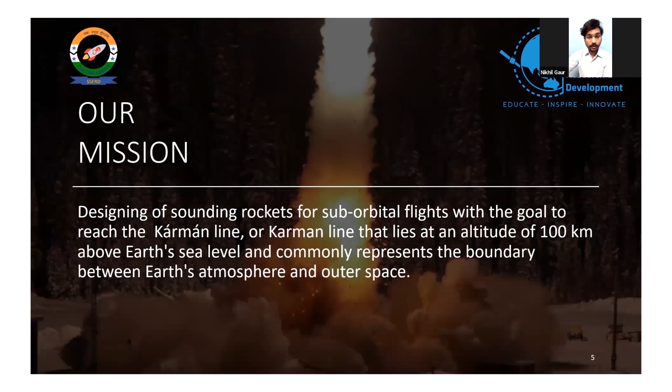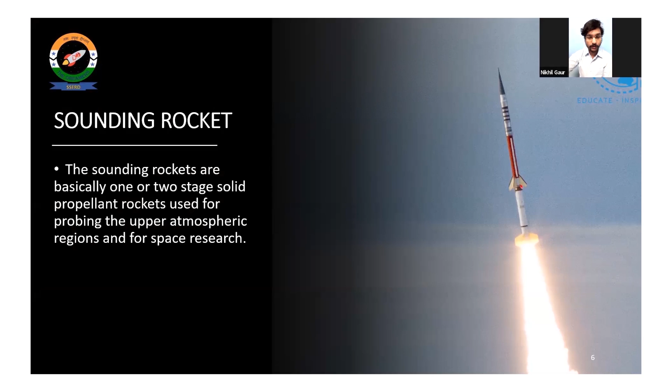Next, the first one is about the project. Our mission is to design a sounding rocket capable of crossing the Karman line, which lies about 100 kilometers above the Earth's sea level, with a total operational payload time of 100 seconds above 100 kilometers. So what is a sounding rocket? Sounding rockets are basically one or two-stage solid propellant rockets used for probing the upper atmosphere for scientific or space research. Now I'll present the mission data we collected.

The first design parameter is delta V, the change in velocity required for achieving our target altitude of 100 kilometers. Here is the total change in velocity we estimated by considering gravity losses and aerodynamic losses for achieving the altitude of 100 kilometers and operational time of 100 seconds. The total delta V comes to 3000 meters per second, or 3 kilometers per second.

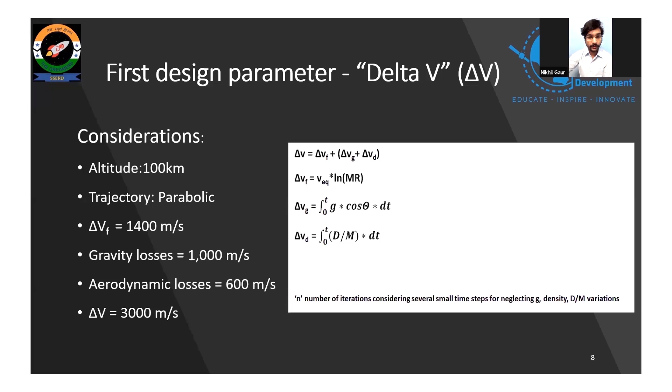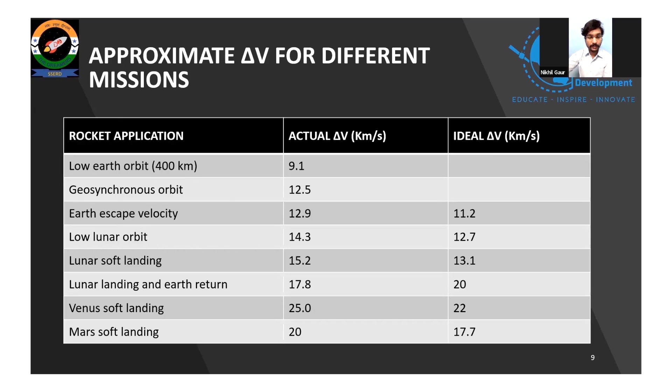We want to grasp an idea about what our delta V should be, as compared to the operational missions of different space organizations. The next prime performance parameter we considered is the ISP, specific impulse, which indicates the performance of the rocket engine. The higher the ISP, the better the performance. Basically it's like mileage for a road vehicle, such as a car or scooter.

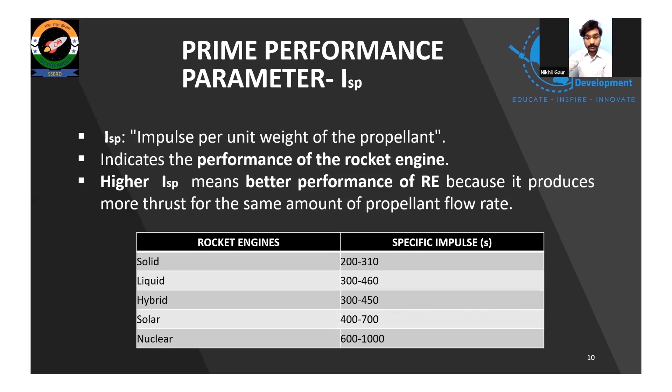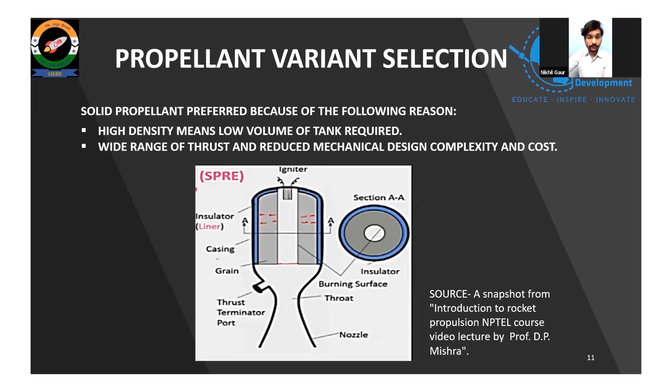These are the different rocket engines and their respective ranges of specific impulses. Out of an intensive data survey we did for different propellants like solid propellants, hybrid propellants, liquid cryogenic, and liquid storable propellants, considering design complexity, cost, and high density meaning low tank volume required, we finally selected the solid propellant rocket motor for simplification of our design.

Here is a schematic of the solid propellant rocket motor. The solid propellant we selected is a new one, a smokeless propellant, HNIW, CL20, China Lake compound. We selected this as our oxidizer and propellant because it gives around 14% higher energy per mass and 20% higher energy density than HMX, which is conventionally used.

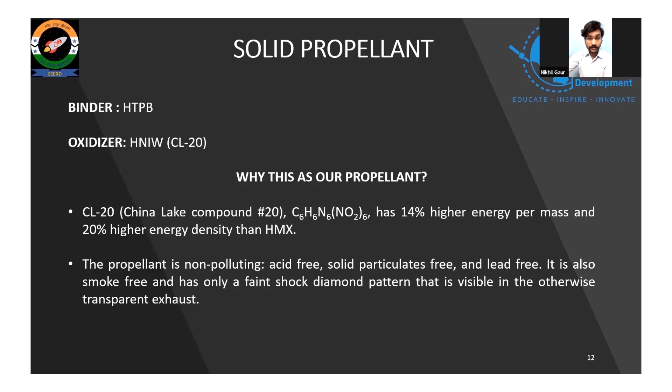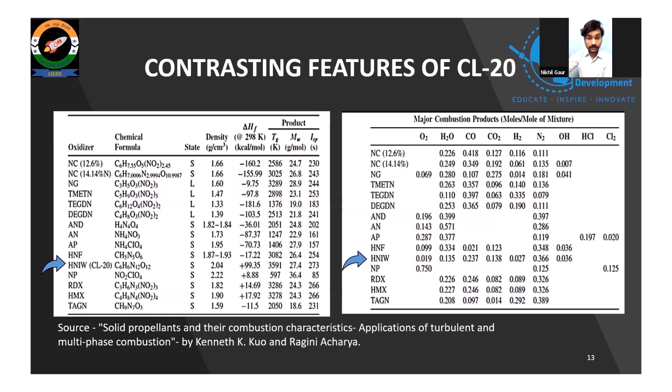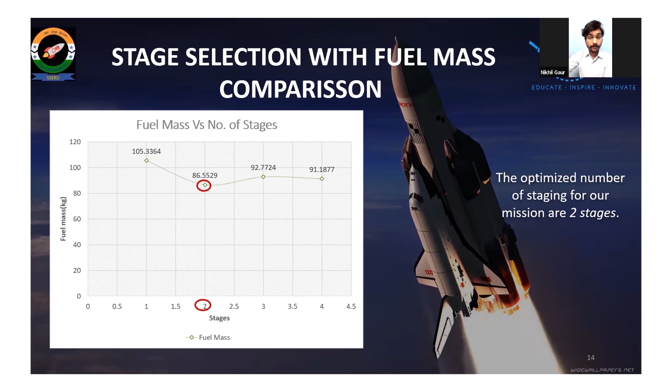Now the question arises, how many stages will we require for our mission? By considering the dry mass budget for different stages — single stage, two stages, three stages, four stages — we conducted this estimation and finalized the fuel masses required. As this graph shows, the two-stage configuration gives us the most optimized number of stages for completing our mission. So we are going with two stages.

Now I would like to invite Amin and Pawan to present their views, data collection, and work on propulsion systems. Hello everyone, good evening. Pawan and I will be presenting the nozzle design and the rocket engine design.

So basically we wanted a very good rocket engine which would propel us to our objective. Beginning with the shape and design, we chose a bell-shaped nozzle rather than a conical or aerospike one, because it had less weight and gave higher performance than a conical one, and it was better for this objective than an aerospike one.

We also chose a material strong enough thermally and physically to contain the heat and pressure of the rocket, so we went with titanium grade 5, which is amazing at holding both. But since it alone isn't enough, we added graphite ablation, which eases off the pressure and temperature along with the titanium. As it ablates away, the graphite takes heat and energy with it, reducing the stress on the titanium. Next, over to Pawan to explain the stage parameters.

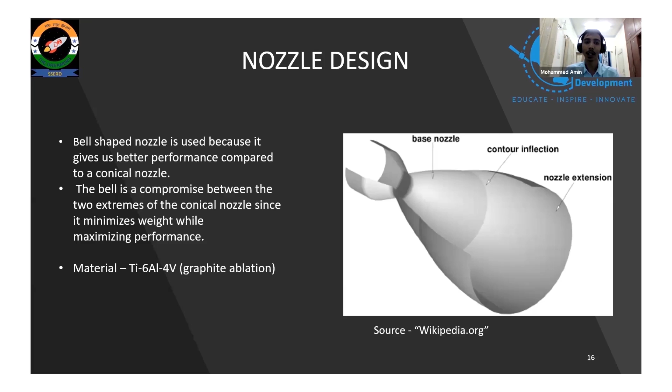Thank you, Amin and Nikhil. Now I'll go over the nozzle parameters for both stage 1 and stage 2. We got the thrust requirement from the system engineering team, around 1015 Newtons, and the chamber pressure was given by the tank design team, around 7 megapascals. Our task was to design a nozzle for both stage 1, at 0 altitude, and stage 2, at 14-kilometer altitude.

We designed it with an expansion ratio of around 93.594 for stage 1 and 140 for stage 2. We got a throat area of around 0.00018 meter square, and the chamber temperature was around 3591 Kelvin. Our propellant, which weighs around 27.4 grams per mole, gave us a gas constant of 303.44.

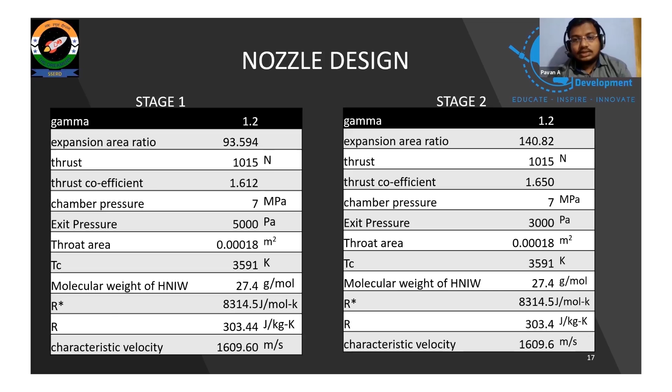Further calculating the exit Mach number and nozzle area parameters, we got a nozzle exit area of 0.0084 meter square, a throat diameter of 0.0107 meter, and an exit diameter of 0.1035 meter. We achieved this with a throat temperature of 3264 Kelvin and a throat pressure of 3.94 megapascals, with an exit velocity of around 2886 meters per second for stage 1 and 2900 for stage 2.

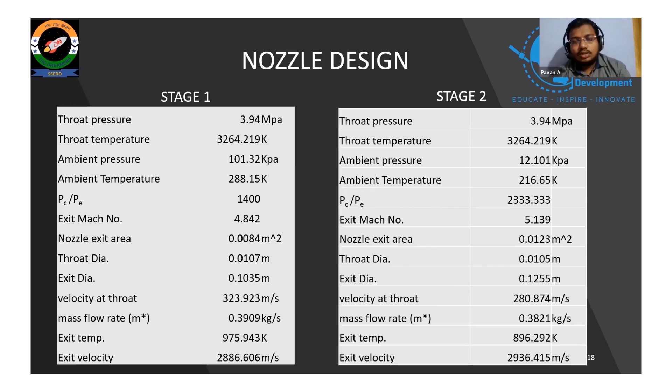We designed almost similar nozzles for both stage 1 and stage 2, since our thrust requirement was the same. Just due to the change in ambient pressure at different altitudes, there was a slight increase in exit Mach number at stage 2 compared to stage 1 — 4.84 at stage 1 versus 5.13 at stage 2. These are the nozzle parameters, and the total nozzle would weigh around 2.24 kgs.

And over to Aditya for tank design. Thank you, okay, hello everyone, good evening. My name is Aditya, and Varun and I are in charge of tank and structure design. Here are the parameters we obtained from the calculations.

Among the materials, we considered titanium alloy, maraging alloy 250, and aluminum alloy, and 15CDV6 steel, and among them we selected titanium. Aluminum, since it has low tensile strength, ends up with a high mass — that was the case for 15CDV6, which also had a higher density. Among both titanium and maraging alloy 250, titanium was least expensive and had more machinability.

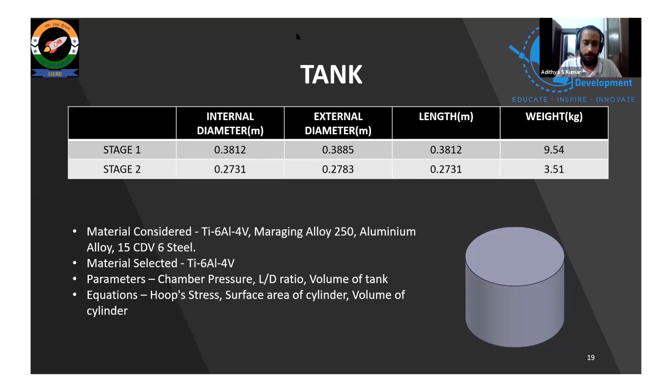We checked parameters like the L/D ratio, the chamber pressure, and the volume of the tank, and basically calculated using Hoop's stress formula and basic cylinder equations.

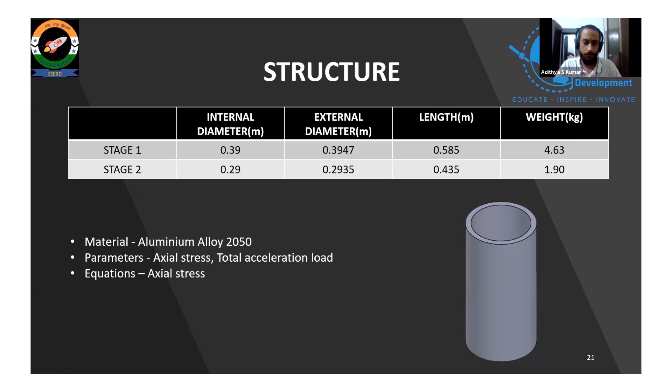Regarding the structure, this is the outer structure of stage 1 and stage 2. Here we chose aluminum alloy 2050, and we calculated thickness using the axial stresses acting on the surfaces of the walls, mainly using the axial stress equations.

About the nose cone, we used a von Karman nose cone because of its superior performance at supersonic, higher Mach numbers, and also chose the same aluminum alloy 2050. We had a small calculation here for the fineness ratio, and we chose a fineness ratio of 2.

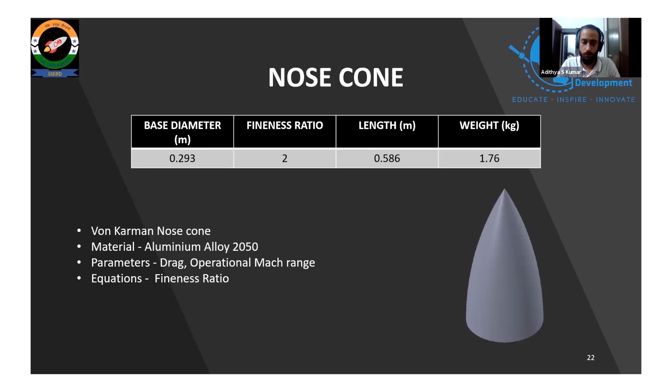And finally, the fin. Here we are planning to use a trapezoidal supersonic fin, in a 3-fin position, used for both stage 1 and stage 2. The material used here is carbon fiber reinforced polymer, chosen because of its aerodynamic properties and since it's used for payload rockets. It's fairly simple calculations — we used fin equations to calculate the overall dimensions.

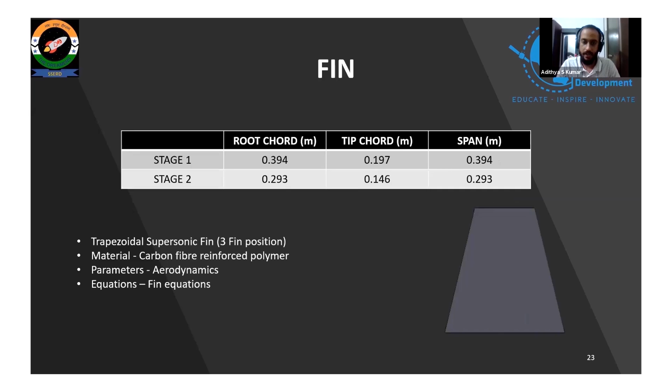This is the final design of the rocket we were designing, and over to you, Nikhil.

Yes, thank you, Adithya. So going forward with system engineering, based on the different designs of the components for the rocket — like the payload, nose cone, fins, structure and tank, nozzle, recovery system, and separation system — we got the dry masses for each stage to be these values.

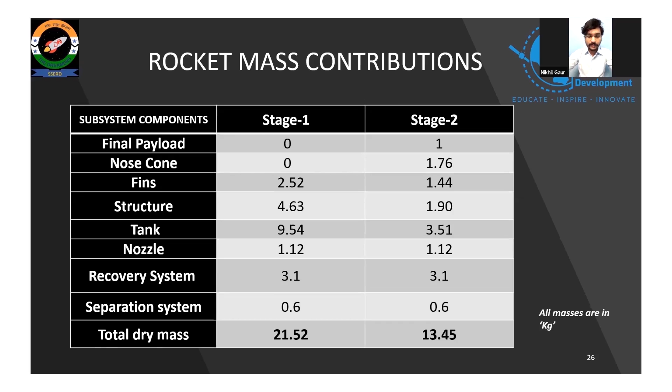We went for an estimation with 30 kgs for both the stages, and by the final mass estimation, we can see we've done a great job reducing the 2 stage dry masses, which gave us an advantage with fuel mass savings. We got around 36% savings in fuel mass compared to using a single stage instead of 2 stages.

Here's the altitude estimation and operation time based on the ISP inputs from the nozzle team, and the propellant mass, which we derived through mass budgeting using delta V equals ISP into G ln MR for both stages. We did these calculations using Newton's equations of motion, since we already considered drag losses, aerodynamic losses, and gravity losses in the delta V calculation.

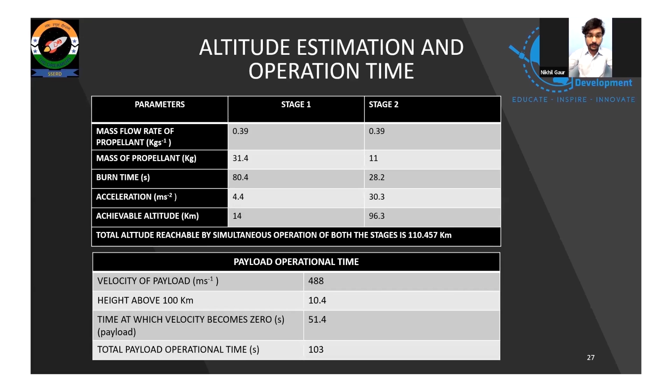Stage 1 is able to make us achieve an altitude of 14 kilometers, and stage 2 makes us reach 96.3 kilometers. So, by the simultaneous operation of these 2 stages, we reached an apogee of around 110.5 kilometers approximately. The payload operational time above 100 kilometers involves coasting for about 10.4 kilometers, and the time at which the velocity becomes 0 will be around 51.4 seconds. So the total payload operational time above 100 kilometers, our design altitude, is 103 seconds.

This is the flight envelope we have indicated here, showing the different staging operations. The first stage will separate at 14 kilometers altitude at t equals 80 seconds from launch. Then the second stage will reach 100 kilometer altitude around 181 seconds, and then it will coast until 110.4 kilometers, our apogee, reaching there at around 231 seconds since takeoff, after which descent will take place.

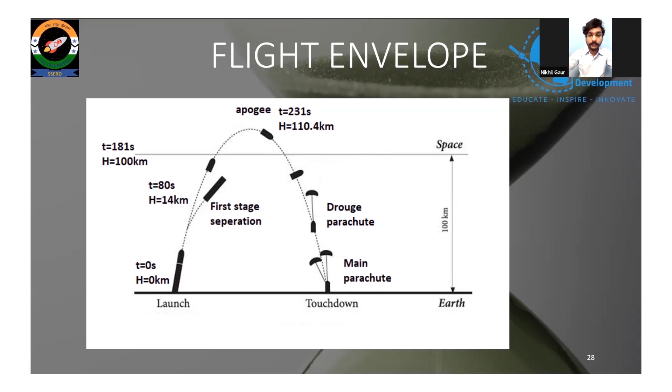Now I would like to invite Shreyas for the separation mechanism.

Thank you, Nikhil. I'm Shreyas, and I handle the stage separation mechanism design. In most multi-stage rockets, it's a practice to discard burnt-off stages to improve efficiency and performance. We carried out a requirement analysis and understood that we need an interstage separator that separates stage 1 from stage 2 after stage 1 burnout occurs.

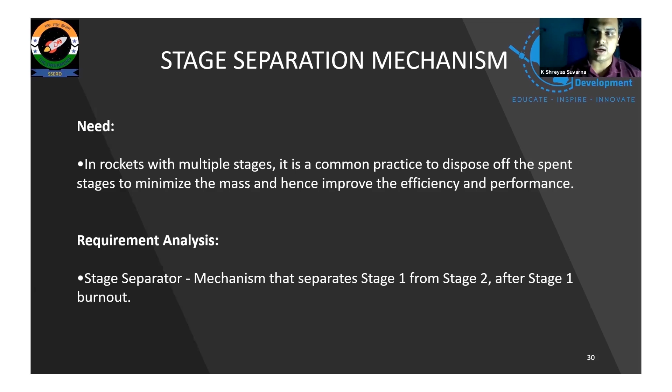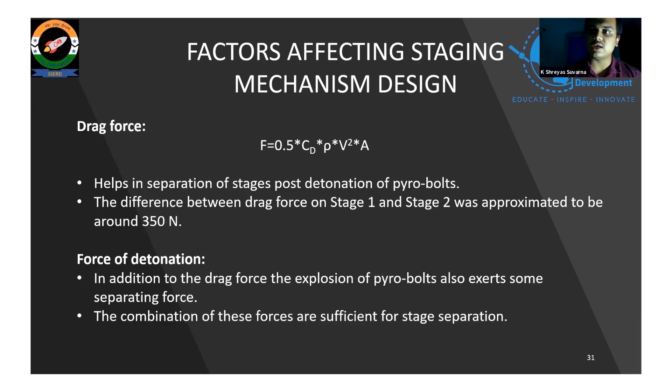There are majorly 2 things that affect staging mechanism design. One is universally applicable: drag force, which helps separate the stages post detonation of pyro bolts, which we'll be using in the staging mechanism. We computed the difference between the drag force on stage 1 and stage 2, approximately 350 Newtons. In addition, we have a force of detonation caused by the explosion of the pyro bolts. These forces are sufficient to ensure clean and neat separation of the stages.

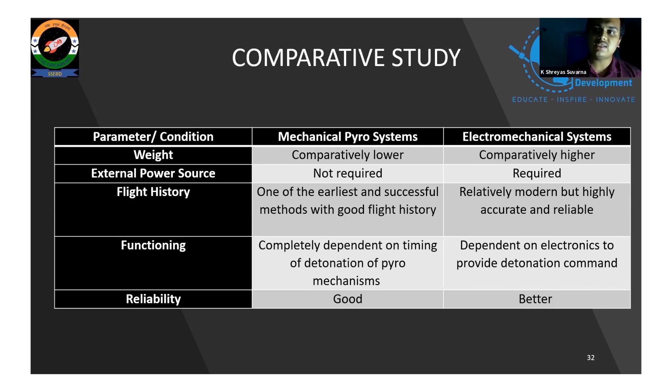Coming to the comparative study, there are basically two types of systems: mechanical pyro systems and electromechanical systems. We found that electromechanical systems depend mainly on avionics and are used in coupling with advanced avionics systems. But in our case, we did not need such advanced guidance systems, so we used mechanical pyro systems. However, our stage separation mechanism can also incorporate avionics.

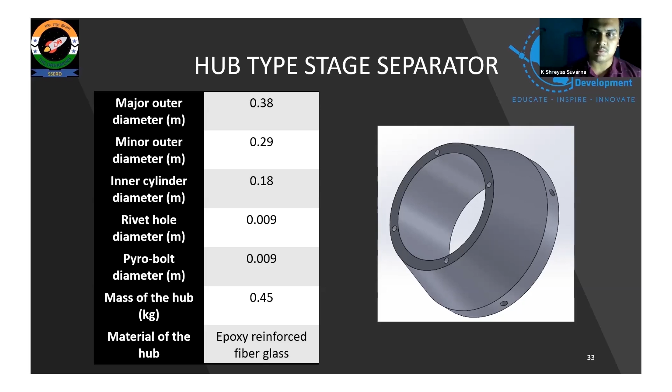So this is the hub type stage separator that we'll be using. We are using epoxy reinforced fiberglass material for creating this stage because of ease of manufacturability and high strength that can be obtained. Since SSERD is a research organization, it is unlikely there will be frequent launches for commercial purposes. Due to this, ease of manufacturability plays a very important role in material selection.

So I hand over to Rohit for recovery system and launch site selection. Thank you, Shreyas. I'm Vamshi, and I'll be handling recovery system and launch site selection since Rohit couldn't make it today.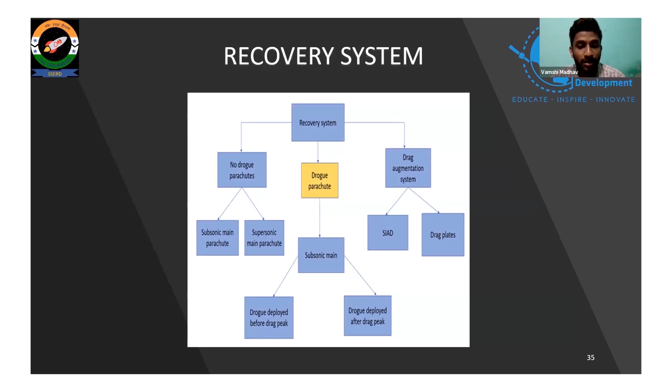We were asked to design a fully recoverable rocket. Hence we needed a recovery system that could recover both stages along with our payload. After reviewing several recovery techniques, we chose the drogue parachute recovery system as a suitable option for our requirements. The drogue parachute will gradually decrease the rocket's velocity when deployed after apogee, and after a while, when it's safe, the main parachute is deployed, which will drastically reduce velocity and ensure a safe recovery.

We selected the parachute shape to be circular to increase the drag force. A cold gas deployment device is used for deploying the drogue parachute, and for the main parachute, we used a spring mechanism to push out the canister when required.

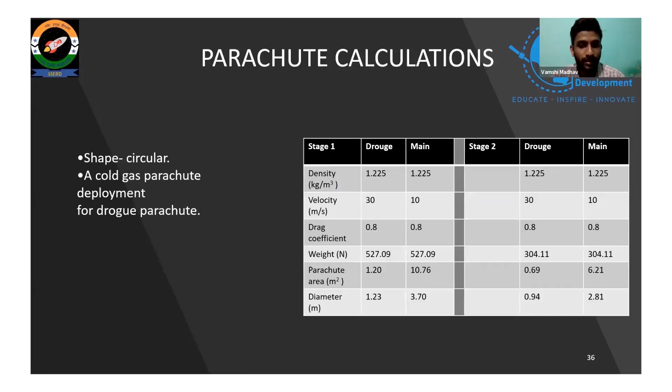Coming to the mass, we estimated the mass for the recovery system in each stage to be around 3.1 kgs. Here's a breakdown of our masses in the parachute and the parachute deployment systems. It's a detailed overview of the main parachute on the left-hand side, followed by the drogue parachute deployment system on the right-hand side. You can check the components in the parachute canopy, parachute bag, suspension lines, everything we included. So it was a pretty detailed analysis, and our estimation is believed to be correct.

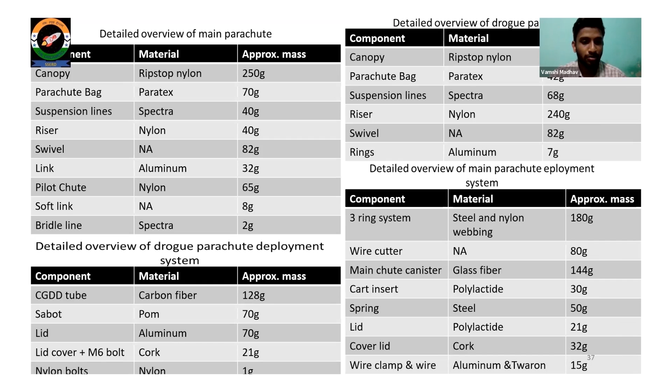Coming to the launch site, there were a few considerations we had in mind. First is the effect of magnetic field, and second is the environmental conditions such as the speed of wind, and third, since we wanted our recovery system to be through sea, that is water recovery, we needed a launch site which was closer to a coastal area.

Therefore, considering the above requirements, we selected the Thumba Equatorial Rocket Launching Station in Thiruvananthapuram, Kerala. In Thumba, the presence of the equatorial electrojet, which is also close to the geomagnetic equator, made it easier for us, and it is even a coastal area helping our recovery system. Therefore, it was selected as our launch site.

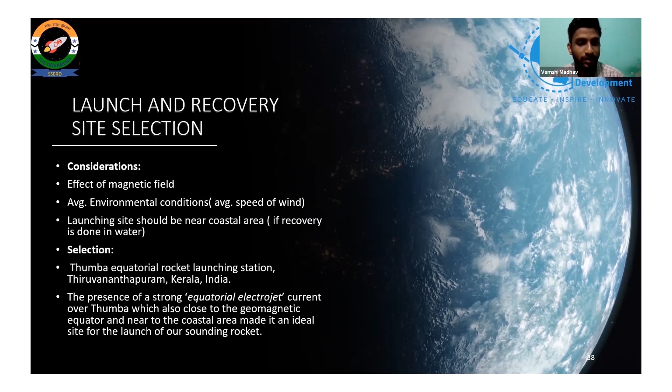Okay, thank you, Vamshi. So at last, for drawing the conclusive remarks and future scope of the work, I would like to say the design sounding rocket D2 uses a smokeless propellant, CL20, which was proven to be efficient to achieve the mission altitude. The electronic systems were not considered in this design, which can become the future scope of this work. The parametric design of the rocket suggests that the design is flexible and the stages are recoverable and can be reused. The rocket can carry heavier payloads also for higher altitude missions. This design reflects uniqueness in its own regard, and it paves the way for future developments.

So I would like to introduce all of you to my team, the Dreamers: myself, Nikhil Gaur, team leader, the assistant team leader Rohit, Aditya, and Varun. They did their work in structural engineering and the tank design. Shreyas in the separation mechanism, Amin and Pawan in the nozzle design, and Vamshi, me, and Preetham in the system engineering.

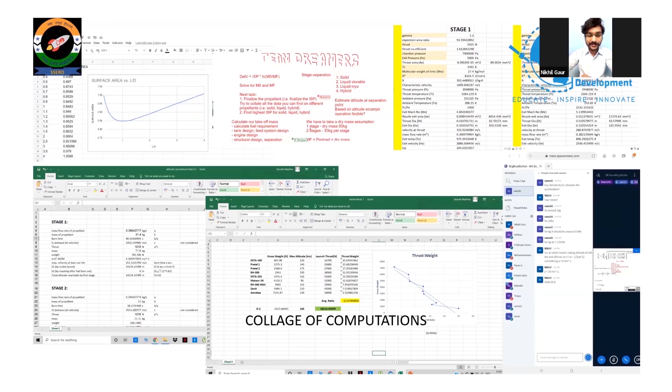So this is a collage of the computations which we did in the course of this internship by using all the online platforms. So at last, I would like to acknowledge...